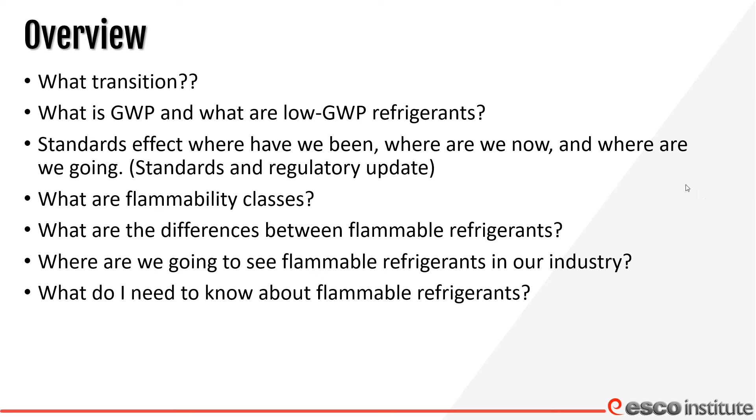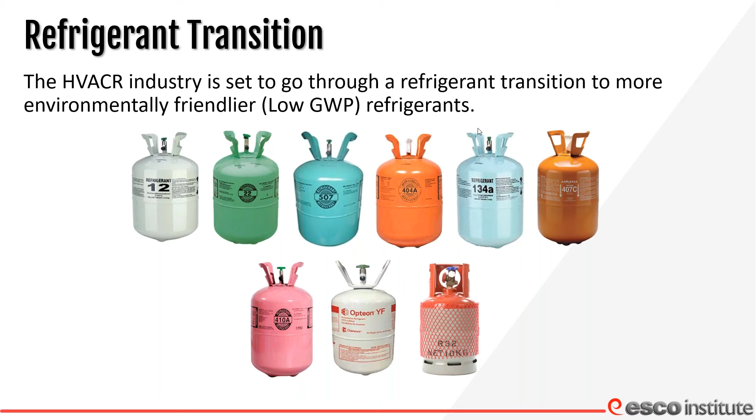As we mentioned, we're going through a transition. The industry is set to go through another refrigerant transition to more environmentally friendlier low GWP refrigerants. This is just a timeline of where we are, where we've been, sort of thing.

Some of us should remember that the CFCs were phased out in the 90s, and the HCFCs are currently being or have been phased out, and HFCs are set to be phased down. Now, I want to clarify the difference between phased out and phased down. Phased out means that the production and importation of that refrigerant is no longer happening, and the future supplies for that particular refrigerant will come from recovery and reclamation efforts from the industry.

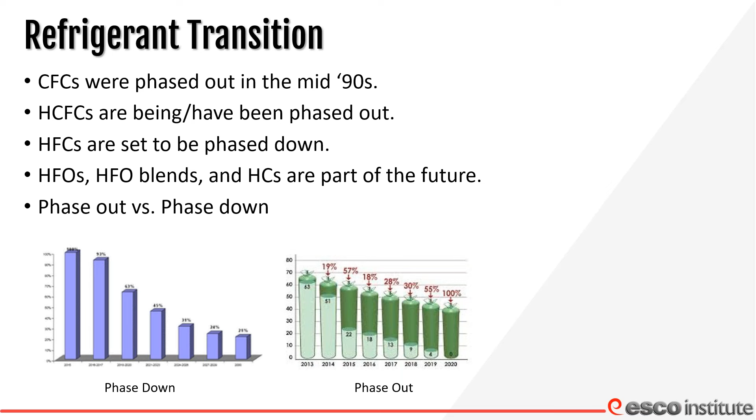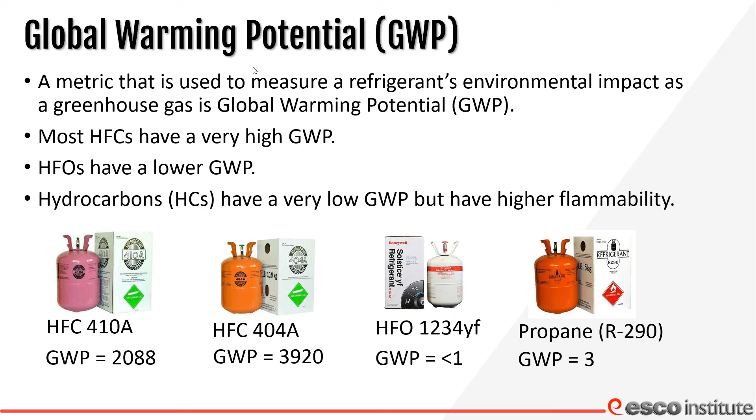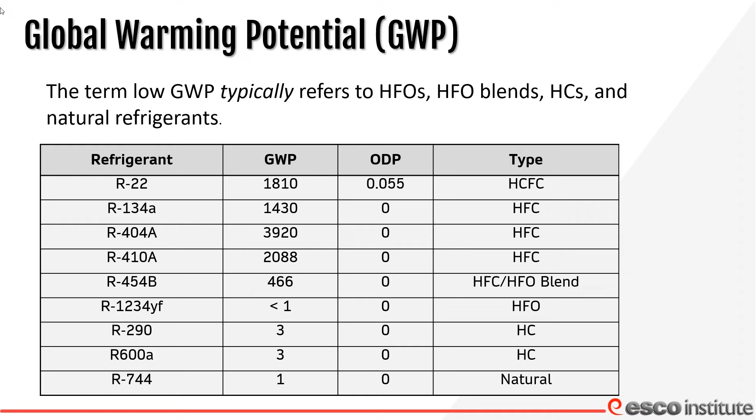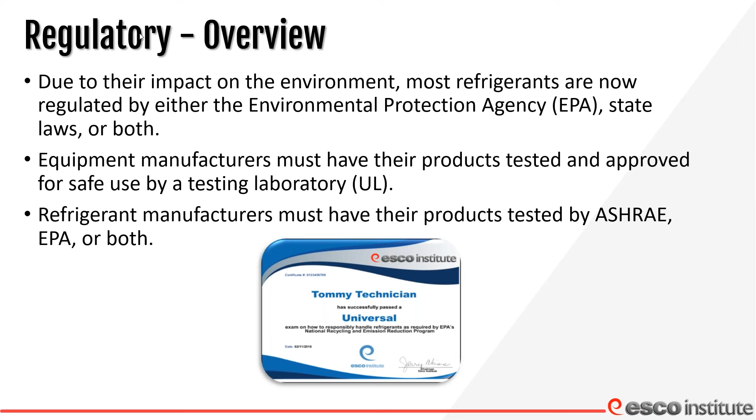Due to the impact on the environment, most refrigerants are now regulated by either the EPA, state laws, or both. Equipment manufacturers have to have their products tested and approved by a testing laboratory such as UL, and refrigerant manufacturers must have their products tested by ASHRAE, EPA, or both. So a lot of these A2L refrigerants are still going to be under the purview of Section 608, still require our 608 license. Some of the hydrocarbons are going to be exempt from recovery. But what we're going to do is take a look at some of the regulations that govern refrigerant system design and use, and jump into some of the regulations and standards that have been updated that will affect the industry moving forward.

Over the years, a series of international treaties, agreements, and things of that nature have been signed aimed at curbing the environmental damage caused by refrigerants. Some of us remember back to the Montreal Protocol, then we had the Kyoto Protocol, and finally the Kigali Amendment. The Kigali Amendment to the Montreal Protocol was an amendment to phase down production and consumption of HFCs worldwide. It should be noted that the Kigali Amendment has yet to be ratified by the world's three biggest HFC users, China, India, and the US.

However, recently, a piece of legislation known as the AIM Act put the US in line with the Kigali Amendment. So what is the AIM Act? The AIM Act authorizes the US EPA to regulate a group of about 20 HFCs. It's a grant of authority to phase down these HFCs. It was signed by President Trump last year, and it mandated that the EPA phase down these HFCs. The goal of the AIM Act is to phase down production and importation of HFCs by about 85% over the next 15 years, and again, this is in line with what we've seen with Kigali.

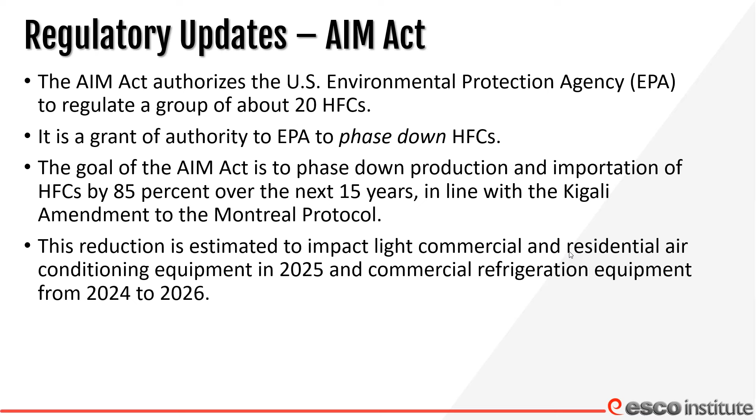SNAP 23. For those of us that don't know, SNAP is the Significant New Alternatives Policy. It's a branch of the EPA, Section 612 under the Clean Air Act, and what they do is identify and evaluate substitutes for ozone depleting substances. Recently, SNAP 23 was approved and signed, and it contains A2L refrigerants for use in a variety of applications. The signing of SNAP 23 clears the way for replacing the high GWP HFCs in the air conditioning sector. We saw back in 2014, 2015, one of the SNAP rulings allowed R32 for use in window units, and now we're seeing it expand. There were 5 or 6 different A2L refrigerants listed in SNAP 23 as approved for use in the air conditioning sector, again, subject to use restrictions.

So we've had the AIM Act signed to phase down HFCs, and we've had SNAP 23 issued, which allowed for the use of A2Ls, again, in the air conditioning side of things. So these things are streaming down the pipeline, and we've got to be ready for them.

A lot of the industry standards, ASHRAE, DOT, and the like have been updated to accommodate and set out the safety guidelines for use of these A2L refrigerants. The two main ones we're looking at here are ASHRAE 15 and the yet to be passed ASHRAE standard 15.2. ASHRAE 15.2 is a new standard, the residential companion to 15. Standard 15 covers design, construction, installation, and operation of light commercial and commercial HVAC equipment and machine rooms. So 15.2 would be the residential side of ASHRAE 15. ASHRAE 15 was updated in 2019 to include the use of A2L refrigerants, and 15.2 is set to publish sometime this summer, maybe early fall, let's say September. So the standards are updated to include these A2L refrigerants.

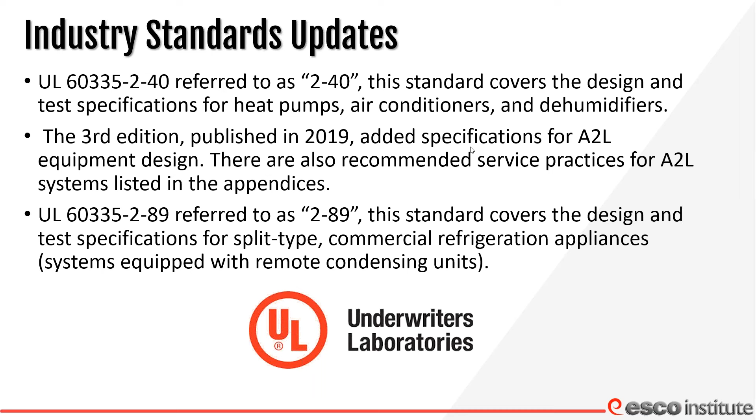DOT and OSHA have issued some clarifications on what's good, what's not good sort of thing. The DOT has recently issued a clarification that up to 12 kilograms or roughly 26.4 pounds of flammable, non-toxic liquefied gas, which include our A2L refrigerants, are not subject to the requirements of a hazardous material regulation. So again, we're seeing OSHA and DOT issue some clarifications to allow for expanded use of these A2L refrigerants as long as safety conditions are met.

Again, I'm going to have to say this on a lot of slides. Always refer to the local jurisdiction having authority if you have any questions about the storage or transportation of A2L or A3 refrigerants.

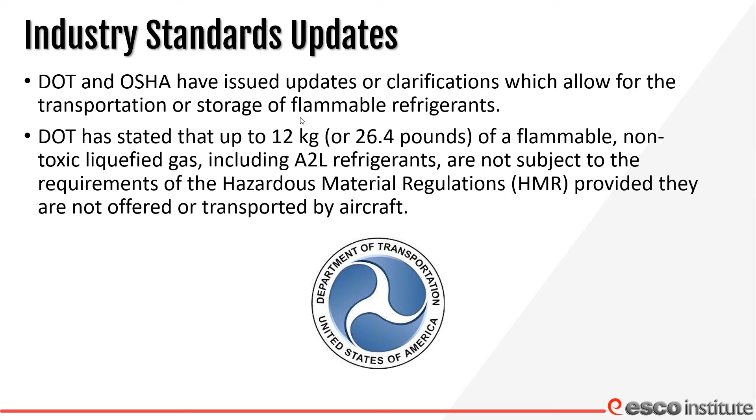So getting into the flammability classes, there's a lot of different numbers and classifications used to identify refrigerants. It can get a little maddening. There's alphanumeric designations such as 22 or 410A or 134A, and there's also classifications based on toxicity and flammability, like A1, A2L, B3. So there's a lot of different classifications and designations assigned to these refrigerants, and it's up to the stakeholders to understand what all these things mean.

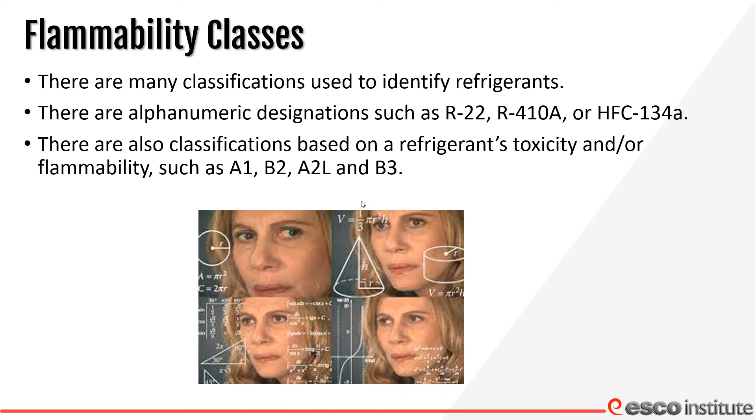When we're getting into classes of flammability, there are different levels. Some of the properties that determine flammability class are the lower flammability limit, the minimum ignition energy, the heat of combustion, and the burning velocity. We're going to take a slide or two for each one of these to go into what these things are and how do they affect a refrigerant's flammability.

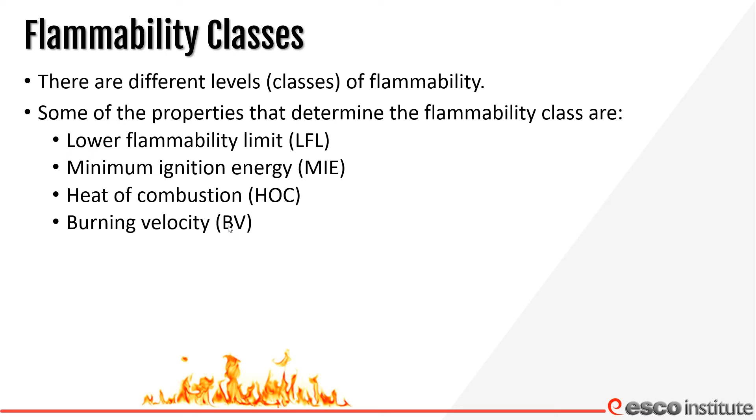So the numbers that we had thrown out there earlier, A1, B2, A3, they come from the ASHRAE standard 34 ISO 817 chart. Toxicity is used to describe the poisonous quality of a substance, and it's represented with a letter, either A or B. A is lower toxicity, B is higher toxicity. Flammability is marked with a number, 1, 2, 3, that sort of thing. Flammability indicates a substance's ability to burn, with 1 being no flame propagation.

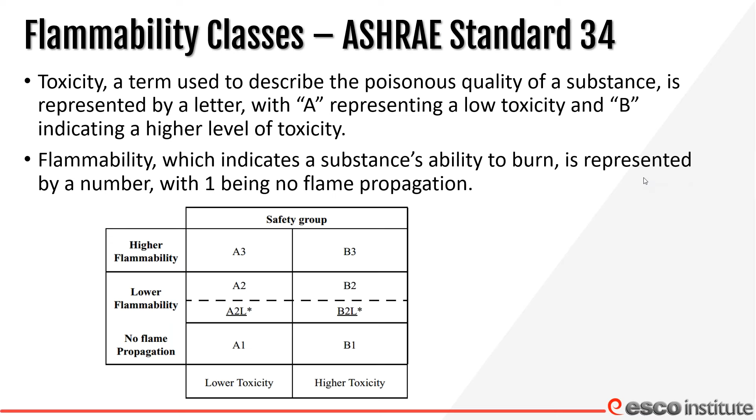Now, I want to point this out, that just because a substance is an A1 does not mean that it is non-flammable. An A1 means no flame propagation. In a catastrophic fire, so to speak, there are a lot of things that will burn, and even A1 refrigerants will burn. So just because it's an A1 does not mean it's non-flammable. It means no flame propagation.

So we've thrown here into this chart that you see on your screen a couple of the different refrigerants and where they kind of fall in the flammability chart. The 2L is a more recent designation. It used to just be 1, 2, 3, and then 2 was subdivided into 2L and 2. The higher the flammability, the higher the number the refrigerant is assigned. An A1 refrigerant would have low toxicity and no flame propagation.

So far, so good. There is a question. I'll try and pull it up. That's a DOT question on the 26.4. I believe that is the total per - I'm not sure if that's total per load or per system or tank. I will do some research and get back to you on that. Thank you for the question.

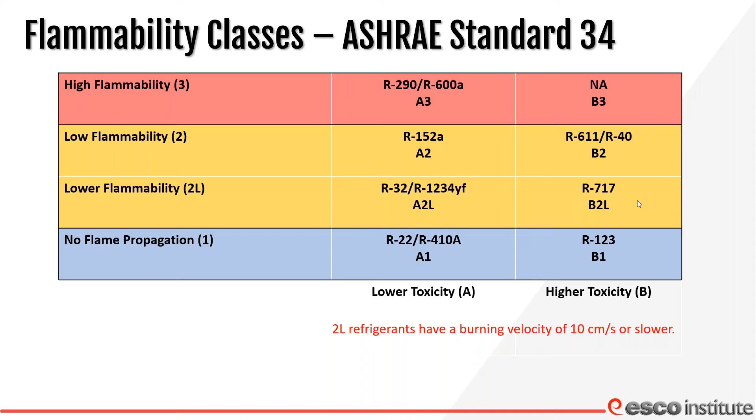All right, diving into these characteristics of a refrigerant that are used to discuss flammability. What helps it get - why does it get the designation A1 or A2 or A3? The lower flammability limit is one of the factors, and the LFL is the minimum concentration of a flammable substance, in this case refrigerants, that is capable of ignition, where we have a sufficient mixture of air and fuel. It's usually expressed as a percentage.

For an example here on the screen, you're seeing I used natural gas. So in order for natural gas to combust, we have to have between 5 and 15% natural gas, and the rest has to be air. If we're outside of that window, it will not burn or explode. So if we have higher than 15% or lower than 5%, we're not going to have combustion. The same is true - each one of these refrigerants has a range like this, a percentage range, where if we're above the upper or below the lower, we're not going to have combustion. So the LFL, again, is the range at which we can have a flame or a combustion, so to speak.

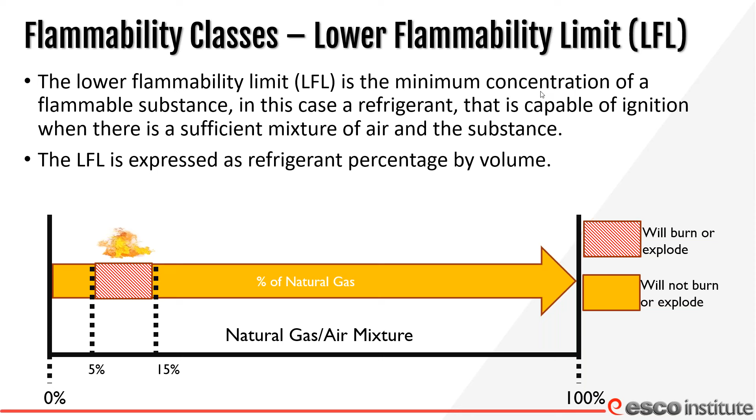Minimum ignition energy is the minimum electrical spark energy in millijoules required to ignite a flammable gas to air mixture.

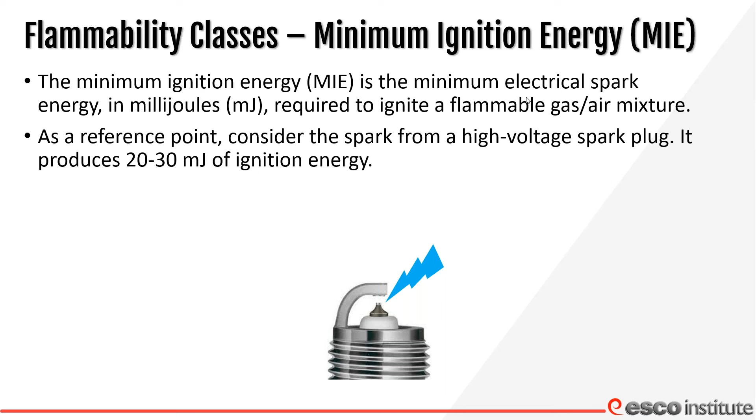For a reference point, consider the spark plug. The high voltage spark produces roughly between 20 and 30 millijoules of ignition energy. Keep that in mind moving forward when we look at the high voltage spark, between 20 and 30, so when I show the chart later comparing ignition energy for different refrigerants, you'll have this as a comparison for what it actually takes to ignite.

Most 2L refrigerants are difficult to ignite because they have a higher minimum ignition energy. A lot of your household items like your toaster, cordless drill, or hair dryer will not ignite these refrigerants. We're also going to see that they require higher concentration levels in order to reach that flammable mixture, that little zone where combustion can occur.

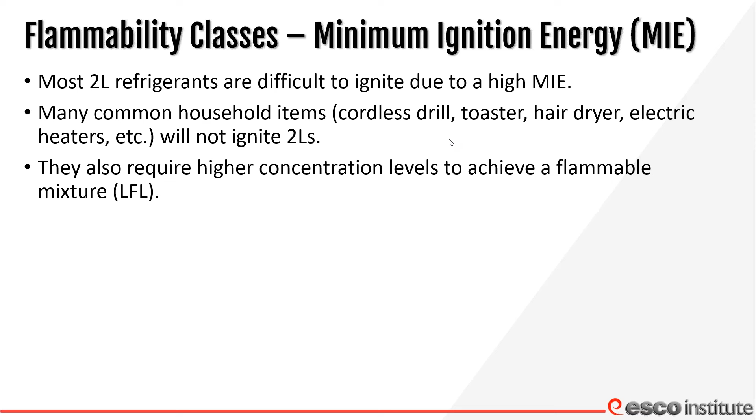Heat of combustion, again, is once the refrigerant has been ignited, the amount of heat released when it burns. Class 2L refrigerants have a much lower heat of combustion than Class A3s. The heat produced by combustion of most 2L refrigerants is less likely to cause the ignition event to spread. It is possible for a 2L refrigerant to burn and not ignite other nearby flammable vapors — it doesn't produce enough heat to sustain combustion.

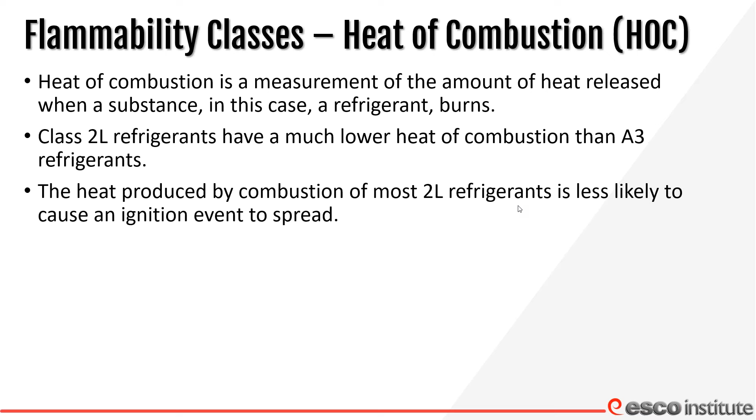Finally, burning velocity is the rate at which the flame front spreads relative to the unburned gas in front of it. In order to be classified as 2L, the burning velocity of the refrigerant has to be 10 centimeters per second or less, making them less likely to sustain combustion after the initial ignition source has been removed.

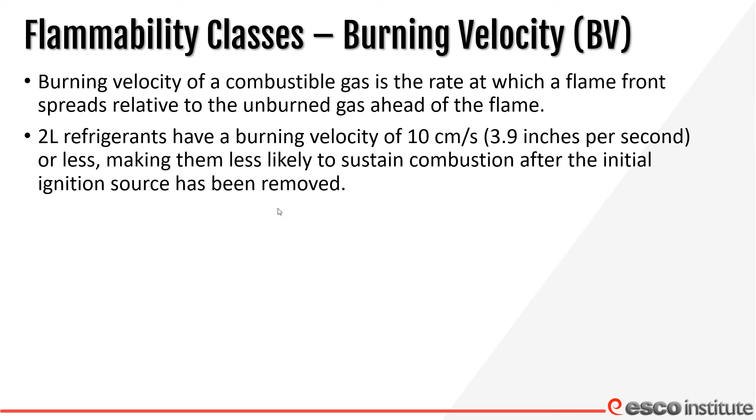So I know I went over a lot there — burning velocity, lower flammability limit, minimum ignition energy, and heat of combustion. To help illustrate these, I'm going to put some charts up and we'll look at some comparisons. Hopefully this helps it sink in. The point is to illustrate that there are differences in levels of flammability — it's not just gasoline and water, there's a whole range in between.

If we look at this chart, we see R32, 454B, 1234YF, 717 ammonia, 152A, R290, and R600A. We're going to compare some of the characteristics, using R32, which is an A2L, and R290, or propane.

Looking at R32 and R290, we'll notice the lower flammability limit, the LFL, for R32 is 14.4%, and for propane it's 2.1% — that's six times higher. So we need a decent amount of R32 in the mixture at minimum for it to ignite. With propane, 600A isobutane, that percentage is a bit lower, even with 152A, so it doesn't take a whole lot in the mixture to achieve ignition.

The minimum ignition energy — thinking back to the spark plug at 20 to 30 millijoules — look at these refrigerants. For R32, it's anywhere between 30 and 100, and the range is there because it also depends on ambient conditions, humidity, and things like that. Propane is 0.25. Isobutane is 0.6 to 0.7. 1234YF, which is in most cars produced today, is 5,000 to 10,000 millijoules, so it's extremely difficult to get an ignition source that will ignite these. Moving left to right, from A2Ls to A2 to A3s, it takes quite a bit of ignition energy to ignite A2Ls.

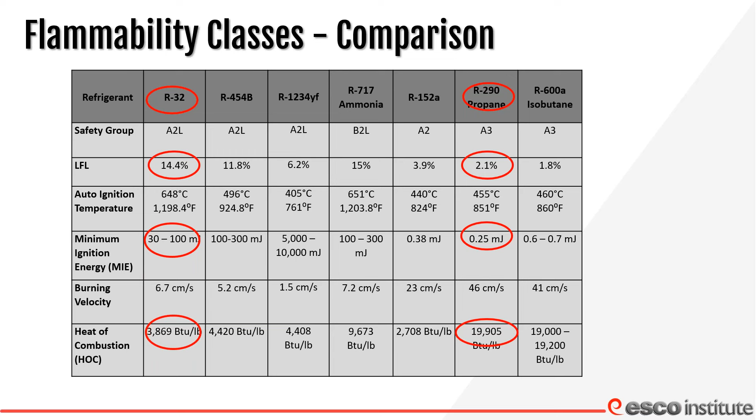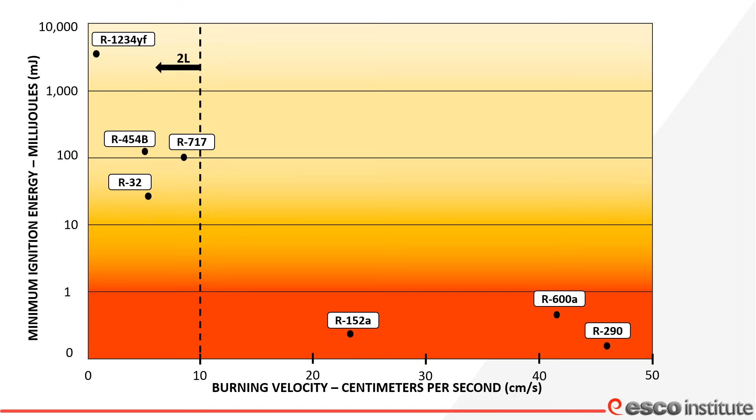I have one more chart here. Again, this shows along the left-hand side the minimum ignition energy in millijoules, and along the bottom the burning velocity in centimeters per second. That's the kind of target: if it's 10 centimeters or less, it'll get that 2L rating. Above that, you're either a 2 or a 3. So looking to the left, we see high ignition energy, low flame velocity—these are the A2Ls. And to the right, very low minimum ignition energy requirements, and they do burn pretty fast. I know I'm throwing a lot of charts.

This is just for comparison, so we can see how these refrigerants all stack up. This chart is divided into heat of combustion and burning velocity. Up on the left we have the heat of combustion, and across the bottom the burning velocity. You can see the different classes: class 2L in the lower left, class 2 in the lower right, and class 3 in the upper right. So class 3, high heat of combustion, high burning velocity. Class 2, not as high as class 3, but still higher. Then we have the 2L, and shown up there on the left are 410A and 134A, just to show their heat of combustion compared with other refrigerants, because they are A1s.

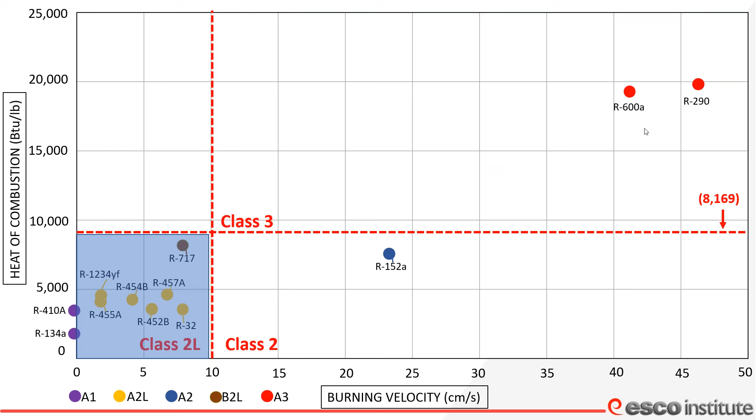The primary areas we're concerned about as far as flammability are the ignition of a leak during equipment operation, the potential for refrigerant ignition during service, or a refrigerant release during a structural fire. The primary areas of concern for toxicity are a release during transit in the service vehicle or a catastrophic leak into a confined space. Toxicity is a concern with any refrigerant—A1s, A2s, A3s. The flammability is something we're accounting for, moving forward with, and making everyone aware of. So technicians should look at the SDS sheets for the refrigerant being used for guidance on recommendations for PPE, potential hazards, or hazard mitigation.

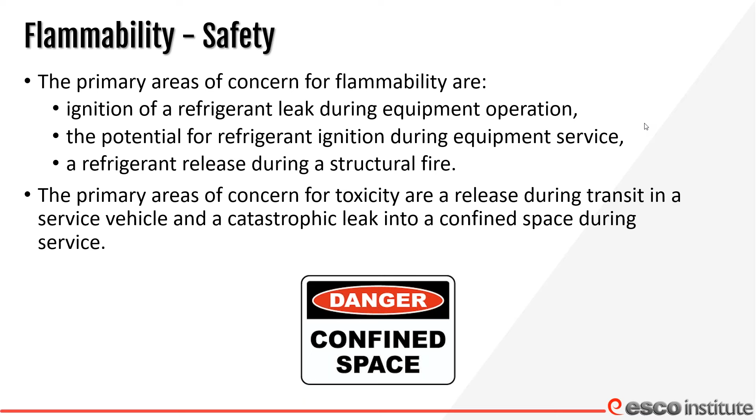For any refrigerant to ignite and continue to burn, there needs to be a competent ignition source with enough ignition energy to light it. The correct mixture—we have to be in that zone between the LFL and the UFL. We have to have a high enough burning velocity to allow the flame front to spread. We have to have enough heat from combustion to sustain the ignition and consume the fuel. So there's a lot of factors, and the stars need to align in order for the refrigerant to both ignite and continue to burn.

So again, the point of this was to show that there are differences in flammability between an A1, an A2L, an A2, and an A3, or a B1, B2, B2L, B3. They are not just all gasoline or water. The conditions have to be right in order for ignition to occur and for the flame to sustain itself.

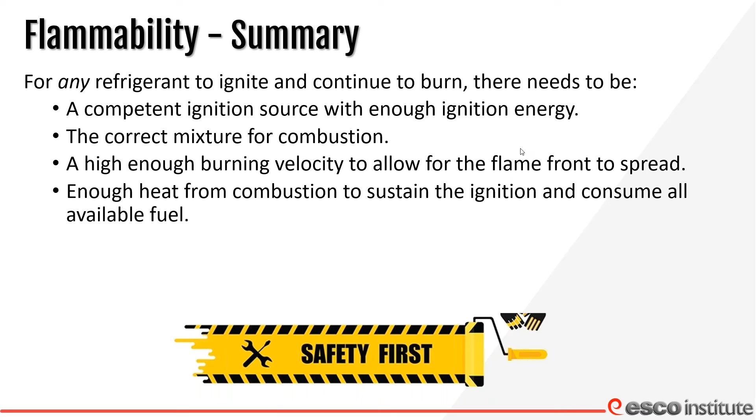These flammable refrigerants, these A2Ls, A3s we're discussing here today, will only be used in new systems that are designed to mitigate the risks, and again where allowed by codes and standards. In comfort cooling, residential, light commercial areas, we will see expanded use of A2L refrigerants such as R32 or R454B. These A2L refrigerants are already being used—we see them globally in the automotive industry. Throughout Europe, Australia, Japan, Thailand, and such, they have been using A2L systems in comfort cooling for about the last decade or so. There's roughly 100 million systems in operation.

I'd like to point out also that we're seeing R32, which is an A2L, in window units since about 2015, 2016, so it's not something that's new. The refrigerators and freezers we buy at the store residentially already have A3s—either 600A or 290 in them. These refrigerants are already in use around us; this is not something that's new. It might be new to us, but it's not new to the industry. We're just having to adjust to the transition. These refrigerants today are around you—they're in your car, in your refrigerator, in the local reach-in cooler at the supermarket. They're in use all over in comfort cooling systems around the world, and they're coming to comfort cooling systems here.

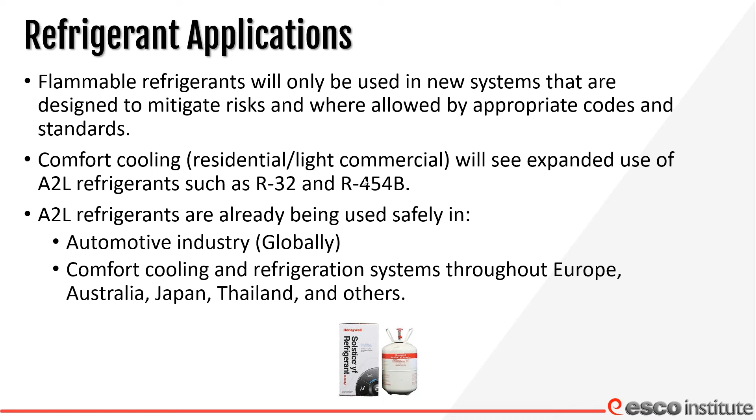We must account for the flammability. So one of the things that we're talking about, control schemes, is mitigation strategies. And the mitigation strategy deployed must be able to reduce the concentration level to keep us below the LFL.

This would typically include some kind of mechanical ventilation, running fans or blowers, that sort of thing. In larger systems, we're going to see active room sensors. The older sensors used to just sound an alarm to let you know to get out of the area. The newer active sensors will not only sound an alarm, but they will then do something - de-energize the unit, energize the unit, put the system into pump down, or activate facility ventilation, something along those lines.

Some manufacturers are looking into isolating the refrigerant charge with a solenoid or with a relief valve piped outdoors. The mitigation strategies are going to vary from one manufacturer to the next.

One of the things that should be noted is ventilation. It's going to be one of the things we're going to see in the standards and codes, that depending on the charge size of the refrigerant, we're going to have some kind of ventilation, some air movement, and this prevents the mixture from reaching the LFL and being able to be combusted.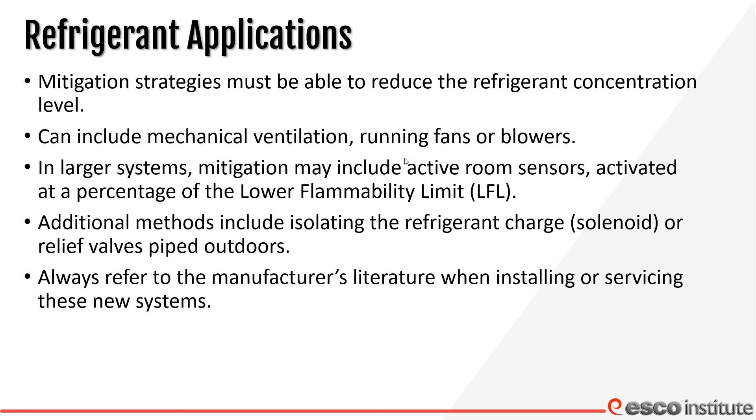It doesn't take a whole lot of ventilation, based on ASHRAE and UL, who've been doing tons and tons of tests on these refrigerants. There are studies published on the flammability of A2Ls and A3s, and they went out of their way to make sure they set these things on fire and burned them completely, measuring how much heat was produced and how much ignition energy it took to ignite them, and what kind of ventilation was necessary to prevent ignition. So we are moving in the right direction, based on sound science and tons of studies. I can't give them enough credit for all the studies they've done and the money they've put into this.

On the refrigeration side, commercial refrigeration, as I mentioned earlier, we're seeing expanded use of smaller charge R290 systems, and as we know, R290 is an A3. Currently, the charge limit for systems with an A3 is right around 5.3 ounces of refrigerant. The charge limit is one of the topics being discussed in the ongoing mechanical code and standard revision committees that are meeting as we speak.

And one of the other things that affects the charge size is the authority having jurisdiction over it. So even with 5.3 ounces, there are some areas where local code may not want them. So again, check with the local jurisdiction having authority about A2Ls and A3s. But these are already out - these R290 systems are widespread. We can find them in most commercial applications, but they are limited to packaged units, as we kind of see in the images there, and they are a smaller charge.

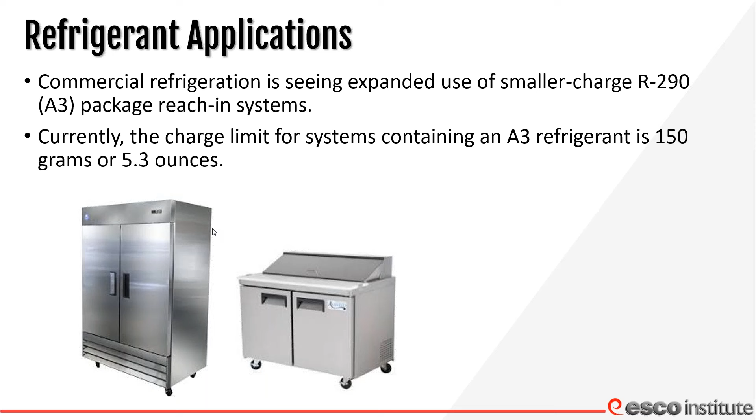We're going to talk a little bit about some system installation stuff, things that we can expect to see when these A2L systems roll off the assembly line and into the back of your truck and into your store or home. The installation procedures for A2Ls and A1s are very similar. Many of the differences that do exist are pre-installation safety precautions that primarily involve evaluating the installation site.

What that means is we're looking at the cubic space, the volume of the space where we're installing. We're evaluating if mitigation is required, those sorts of things. Again, we're also checking with the authority having jurisdiction if it's allowable. And I will also mention, defer to the manufacturer's installation guide when sizing out and installing an A2L or an A3 system.

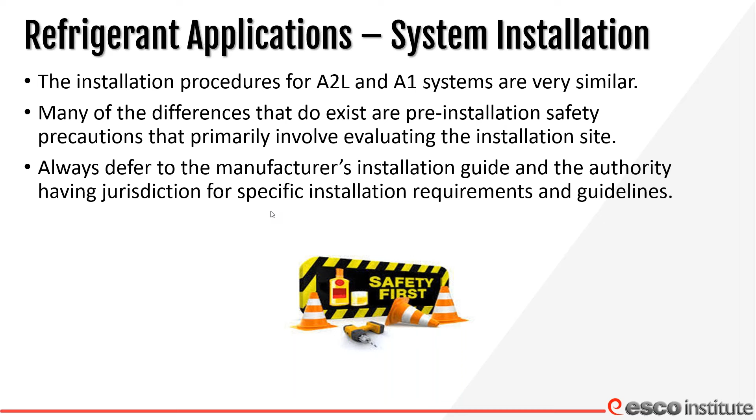As I mentioned, with these A2L systems we have to look at the installation site, make sure that it's adequate for this refrigerant. One of the things that's going to be different from the A2L systems and the A1 is the maximum charge size - it's going to vary from unit to unit. There's not going to be a universal maximum charge size. The space where we're installing this system must be large enough and have enough air to keep the refrigerant, should it leak, at or below a percentage of the LFL.

The manufacturers will be required to print charts, both charging and sizing charts, in their installation literature to help with these calculations. I know nobody wants to sit and try to do the formulas found in some of these standards - they are some complex formulas. I spent some time staring at them and working them out, and they are pretty rough, but there will be charts designed in the installation literature to help say, okay, what's the largest space I can install this in, what's my maximum allowable charge, that sort of thing. So to help the transition, there will be a lot of information published in the manufacturer's installation guide, and that's a code requirement that they publish all of this information.

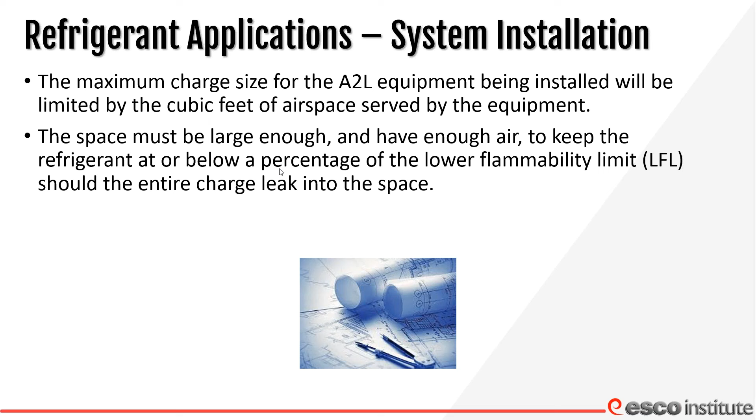Getting back to the charge, while the process of charging the system is the same, there are some additional safety factors to take into consideration. We add R32 the same way we add R410A. You can charge R32 as a vapor since it's a single component refrigerant if you wish. The blends, again, we're still going to charge as a liquid.

The maximum allowable charge is not a universal figure, and it will be different for every system installation. The codes and standards print maximum allowable charge sizes, and these are two terms I want to familiarize you with: the M1 charge and the M2 charge.

We're allowed by code to charge a system without ventilation installed, and we refer to that as the M1 charge. There'll be a weight listed, let's say 5 pounds. That's the maximum charge for this system if there's no ventilation installed. That charge can increase if ventilation is installed, so the charge size can go from 5 pounds to 10 pounds. Again, those numbers are just examples.

Each different refrigerant will have a chart with an M1 and an M2 charge. What I'm trying to point out is the difference between those numbers. We have to get used to seeing M1 and M2, and the difference between them is whether ventilation is installed in the space where the system and refrigerant components are located.

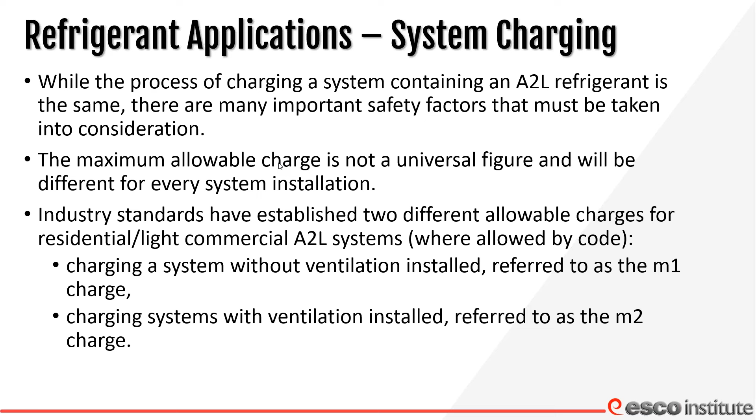So far, so good. This is a quiet bunch, by the way.

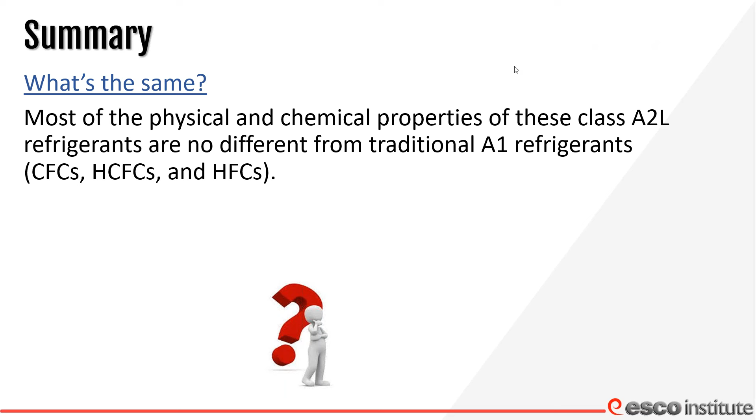So what's the same? Most of the physical and chemical properties of the A2L refrigerants are no different from the A1 refrigerants. Some of the A2L and A3 refrigerants even offer better efficiency and capacity compared to their predecessors, the CFCs, HCFCs, and HFCs. So from a chemical property and heat transfer standpoint, we're not looking at any major differences.

What's different? These low GWP refrigerants include some of the A2Ls. Let me stop right away and say low GWP refrigerants will not all be A2Ls. Most of them at the moment are, but that doesn't mean all of them will be. There are other low GWP refrigerants that may have a different classification based on either toxicity or flammability.

For example, ammonia is a low GWP refrigerant, and it's classified as a B2L. So I'm throwing A2L out there, but I want you to understand that low GWP doesn't automatically mean A2L. It just means it's a refrigerant with a low GWP.

There was a question asking whether small leaks change the composition or change the LFL. The LFL for the refrigerant is what it is. For blended refrigerants, I'd defer to the manufacturers. When 410A initially came out, one of the main concerns was fractionation with leaks, and they put that to rest after exhaustive studies showing it doesn't fractionate to the point of changing the composition, so it can be topped off. Again, I'll defer to the manufacturers on whether leaks change the composition.

But if it's a straight refrigerant, say R32, it's a single component refrigerant, so there's not much to worry about. The LFL is the LFL established for the refrigerant by ASHRAE in ASHRAE Standard 34.

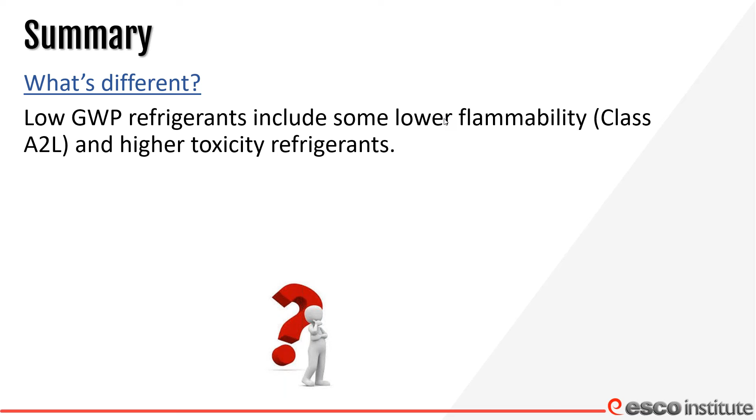So what do I need to know about these stakeholders? When I say stakeholders, I mean technicians, contractors, store owners, homeowners, even people at the supply house, storage, shipping, transportation — anyone who's going to touch these refrigerants in the food chain, so to speak, from the time they're manufactured till the time they end up in a system. That's a stakeholder, and we have to be competently trained in the proper handling and mitigation of risks due to the lower flammability or toxicity associated with some of these refrigerants.

So an industry stakeholder could be someone who owns a grocery store, someone who works on the unit in your home, someone who sells these systems to a contractor, or the manufacturer rolling them off the assembly line. There's no end to what we can classify as a stakeholder — anyone who's going to see these refrigerants in any manner.

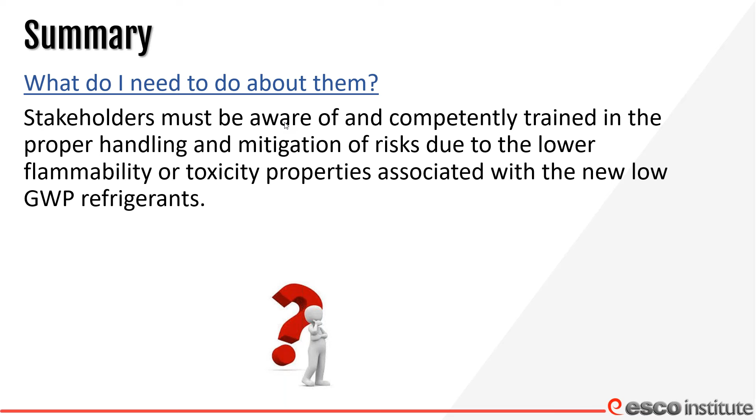As I brought up in the last slide, competent training and understanding risk mitigation — training is the number one way to ensure a successful refrigerant transition. No matter what type of refrigerant or system a technician is servicing or installing, proper training is the foundation. All industry stakeholders involved in this ongoing transition can benefit from some kind of safety or awareness training.

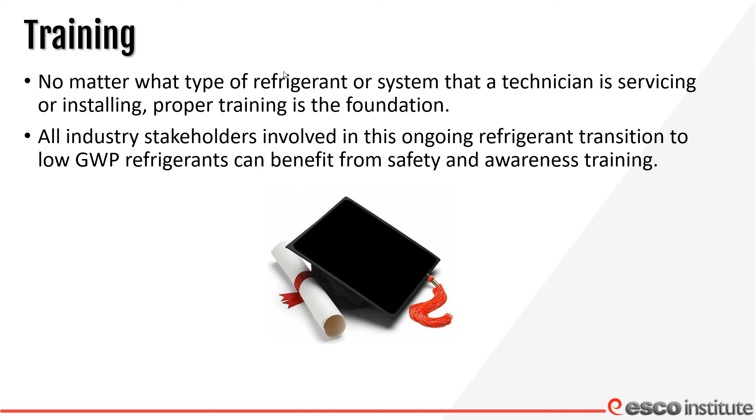Having said that, ESCO, the company that I work for and am doing this webinar on behalf of, does have a low GWP refrigerant safety course already up and running. There are other programs up and running as well. I don't want to state that we're the only game in town, but we are one of the games in town. We have the Low GWP Refrigerant Safety, flammable and mildly flammable refrigerant book. It's available in print and in an e-learning format, and there is a closed book 50-question safety certification exam that you can take to ensure retention.

AHRI has formed a committee with working groups to provide information to industry stakeholders and help ensure a smooth transition to these low GWP refrigerants. This information is available on the Safe Refrigerant Transition Task Force website. I'll put a link up there for you at the end of the presentation. I just want to make you aware there's plenty of places to get information on these low GWP refrigerants, depending on how deep you're looking to get into it, whether you're looking for something at an awareness level or in-depth information.

One of the questions that came up is how exactly do they determine GWP? They compare the global warming potential of a gas, the heat trapping ability of a gas over, I believe, a 100-year period, when compared to the heat trapping ability of CO2. Now, how scientifically that is done, I couldn't say. I could probably look into it, but it is a comparison of CO2 being the baseline with a GWP of 1 and its heat trapping ability, how long it sticks around in the atmosphere over a 100-year period. Then they compare each refrigerant to CO2: how long does it hang around in the atmosphere, how long is the carbon around, and how long does it trap heat. And it is a 100-year period, yes.

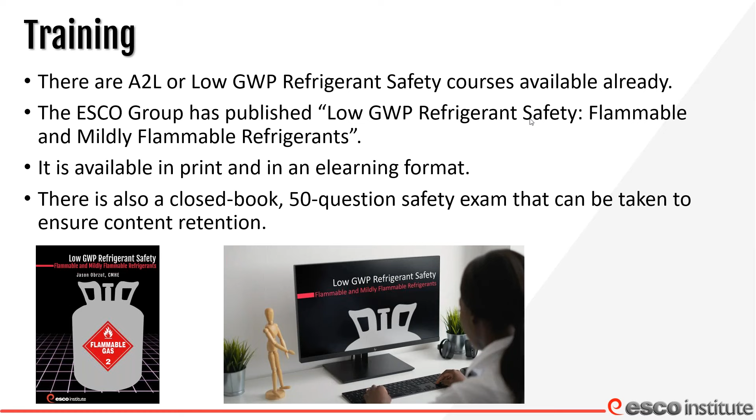Again, on the AHRI site, you'll see a lot of information - links to webinars, papers that have been published. And if you pay attention to any of the publications, such as the ACHR News or other industry publications, there are articles, webinars, and things being done across the country on awareness of these particular refrigerants, what we need to know, and how to prepare for them. The fact is they're coming, and we don't have to be as concerned as initially. When I started doing these webinars early on, there was a lot of concern that we're going to start blowing ourselves up. Listen, the rest of the world has been using these for over a decade safely. We can do the same.